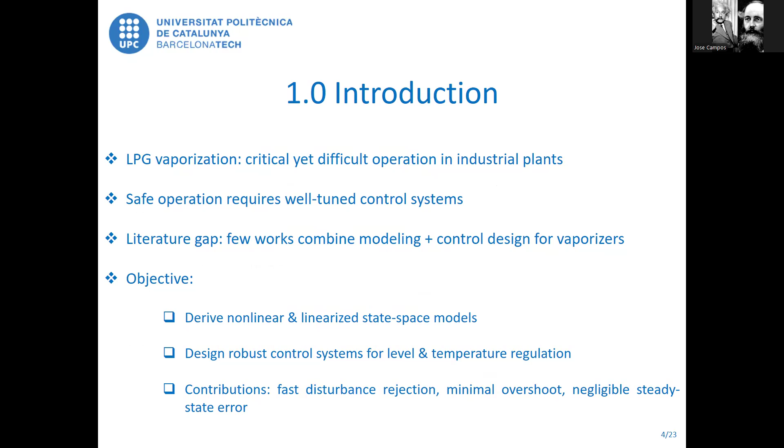Now we move to the process description. The system consists of a pressurized cylindrical vaporizer tank. Main elements are LPG controlled by valve 1, as you can see in the process diagram in figure 1, a steam heating coil controlled by valve number 2, and vapor outlets with condensate trap. The main control variables are liquid level, which is designated as h(t), pressure, which is labeled as P(t), and condensate temperature, which is labeled as Ts(t). This configuration, of course, introduces strong coupling between pressure, temperature, and liquid dynamics.

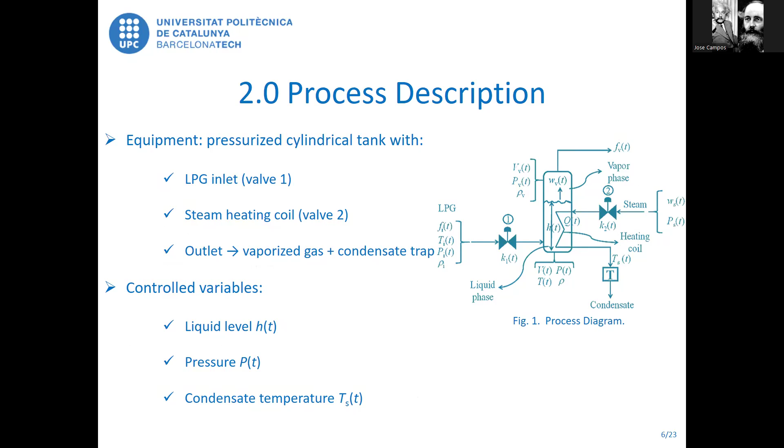Two control strategies were evaluated: a single loop feedback control for liquid level, and cascade control for pressure and temperature. The performance was evaluated using figures of merit like, for instance, overshoot less than 5%, steady state error less than 1%, and those criteria ensure industrial applicability in order to have some tunings with real cases.

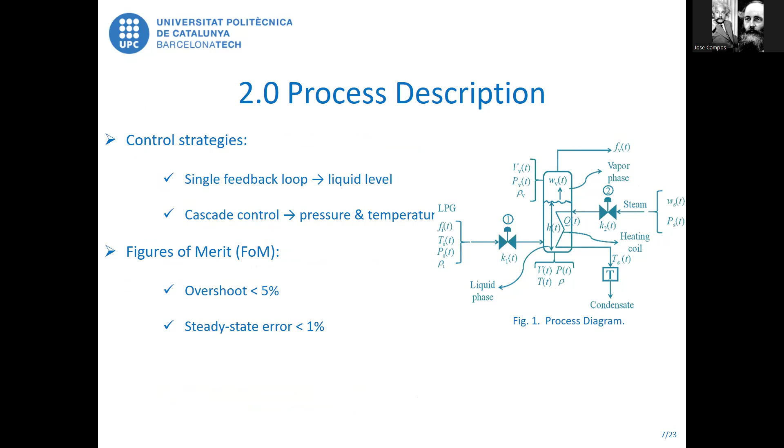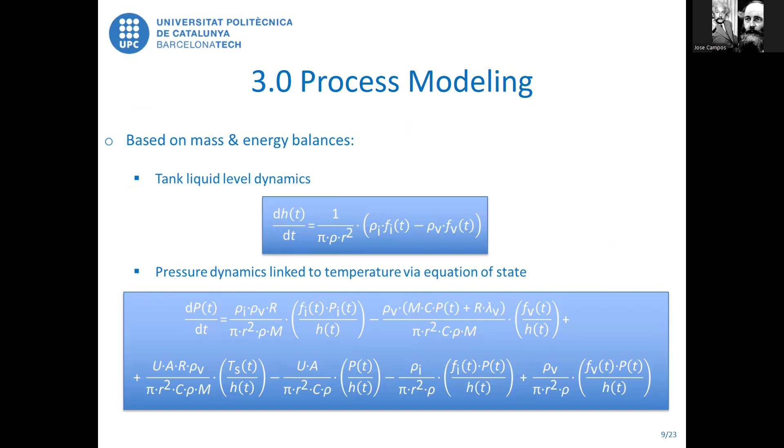Now we proceed to the process modeling. The modeling stage begins with mass balance of the liquid phase, energy balance of the system, and vapor phase pressure dynamics. Now, the model captures, as you can see here, nonlinear thermodynamic behavior, coupled hydraulic thermal interaction, and valve-dependent inflow and steam heat transfer.

Now, the nonlinear model is derived from conservation of mass, conservation of energy, and ideal gas relationships for the vapor phase. But also you can see that the system results in a set of nonlinear differential equations describing liquid height dynamics, vapor pressure evolution, and thermal energy exchange.

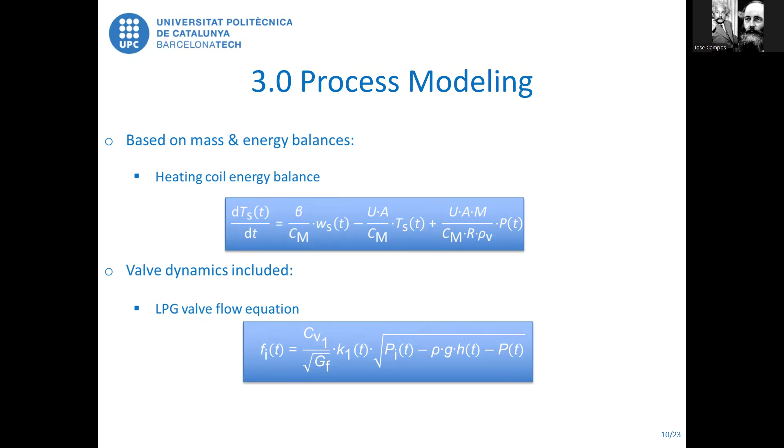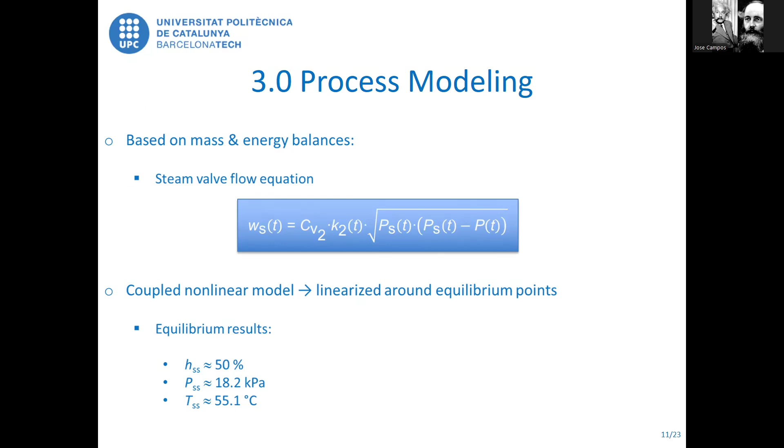Now, for control design, the nonlinear model was linearized around the operation point, as you can see in this slide, expressed in a state space form. So we think that with this approach, it is possible to use some classic control techniques and apply them to this linear model, preserving at the same time physical interpretation.

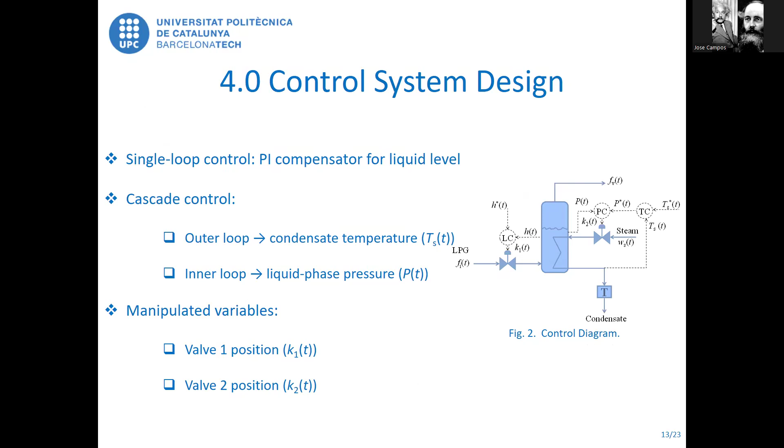Now we will discuss the control system design. Two control structures were implemented. In the first place, single loop control, where a PI controller was applied for the liquid level. Then a cascade control, where the outer loop is related to the condensate temperature TS, and the inner loop relates to the pressure P(t). At the same time, manipulated variables are valve 1 position, which is labeled as k1(t), and valve 2 position, which is labeled as k2(t). Cascade control improved disturbance rejection and robustness, as the theory states.

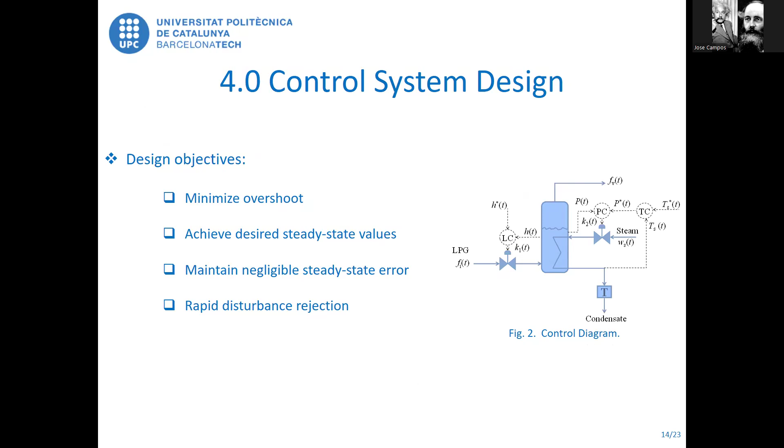Now, design objectives include minimize overshoot, ensure fast convergence, achieve negligible steady-state error, improve disturbance rejection, and of course, the controllers were trying to satisfy the industrial figures of merit, which were stated in the slide before.

Now we move to simulation results. For level control, for instance, the system shows stable behavior, as you can see in figure number 3, minimal overshoot, zero steady-state error, and the step changes were applied at 200 seconds and 400 seconds. The controller maintains stability under transient conditions.

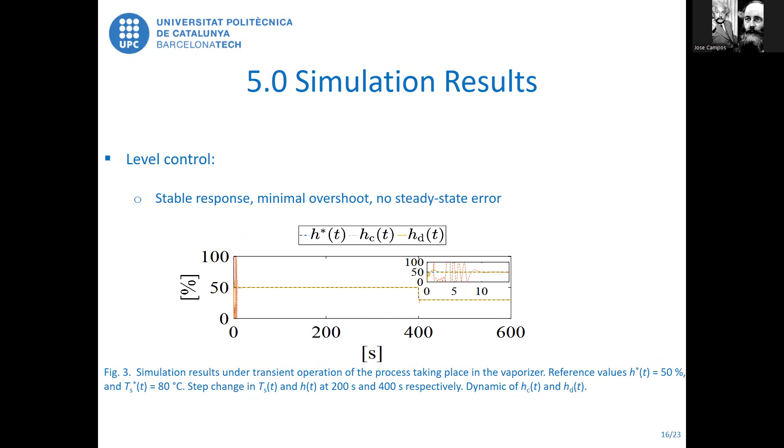Now, with the cascade control, the pressure regulation is significantly improved. The pressure control becomes more robust, and disturbances in LPG and steam flow are effectively compensated. The manipulated flows, in this case, are LPG inflow and steam flow. And those flows show more dynamic behavior without oscillation. This indicates good controller tuning and actuator stability.

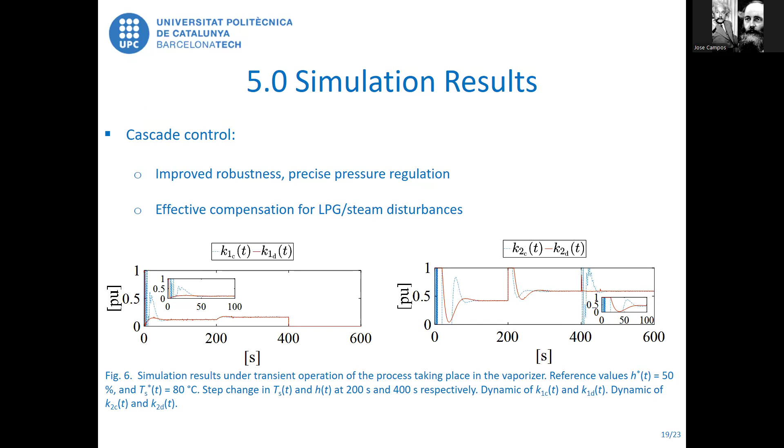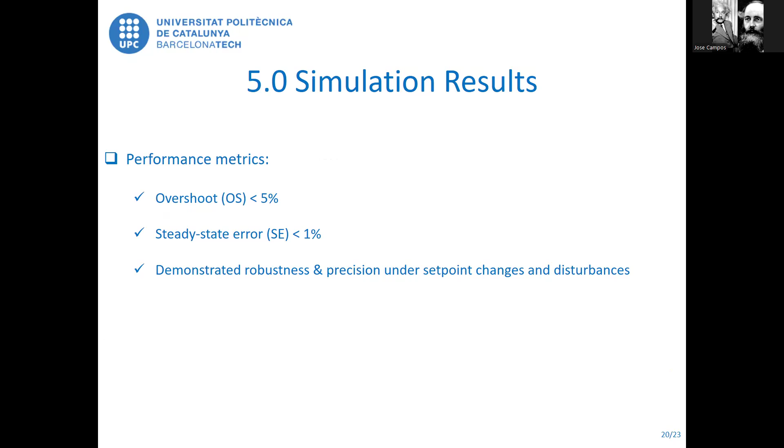Now, valve position remains within realistic operation bounds, as you can see in this slide. No saturation or instability was observed for a long time. And this confirmed somehow the practical feasibility. The performance results show an overshoot less than 5%, a steady state error less than 1%, and strong robustness under disturbances. So cascade control, in our point of view, shows a clear outperformance over single loop control.

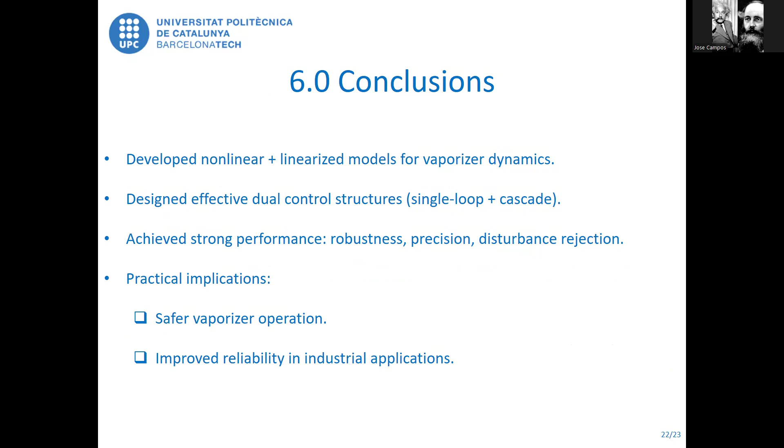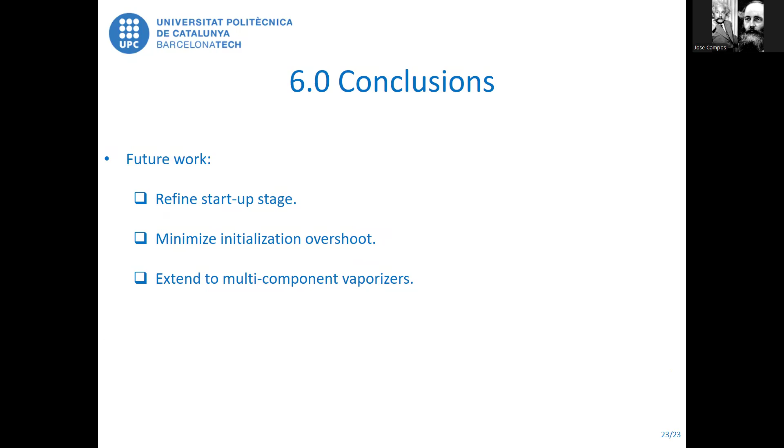Finally, we conclude that basically this work developed nonlinear and linearized models, designed a dual control strategy, and demonstrated robust and precise dynamic performance. Practical implications include, for instance, safer vaporizer operation, improved reliability, and enhanced disturbance rejection. Future development can include, for instance, refinement of the startup stage, reduction of initialization overshoot, and extension to multi-component vaporization systems. Thank you.